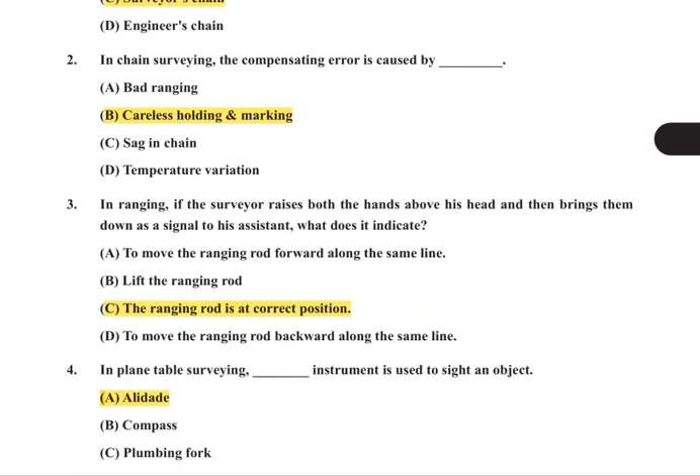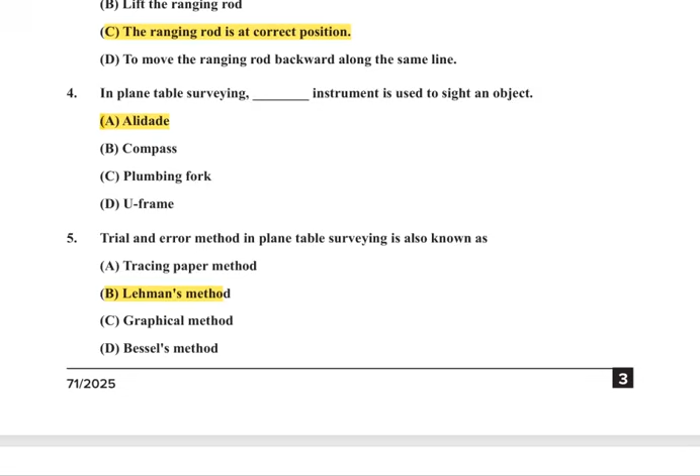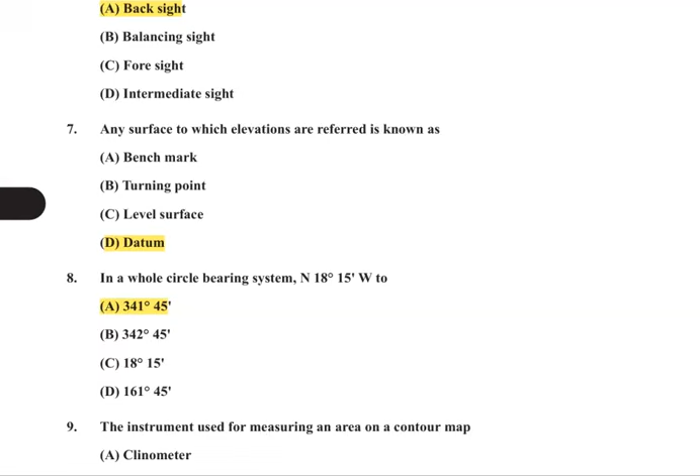4, in a plane table surveying, dash instrument is used to sight an object. Alidade A ആണ്. 5, trial and error method in plane table surveying is also known as B, Lehman's method. 6, in leveling, plus sight is also known as A, back sight. 7, any surface to which elevations are referred is known as D, datum. 8, in a whole circle bearing system, N 18 degree 15 west to A ആണ് 341 degree 45 minutes. 9, the instrument used for measuring an area on a contour map is C, planimeter.

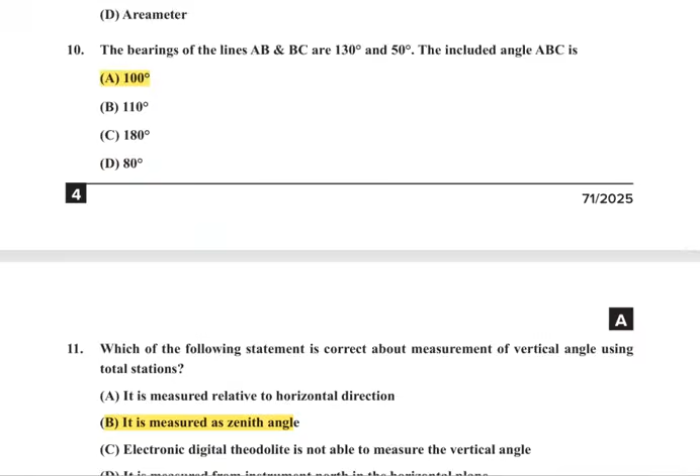10, the bearings of the lines AB and BC are 130 degree and 50 degree. The included angle ABC is A, 100 degree. 11, which of the following statement is correct about measurement of vertical angle using total stations? B, it is measured as zenith angle. 12, theodolite can be used for - ഇവിടെ എല്ലാം ഉണ്ട്, all of the above, D. 13, the least count of a theodolite is A, 20 second.

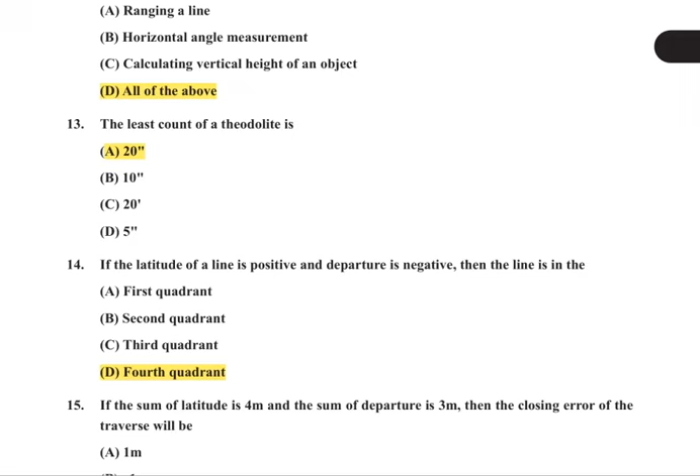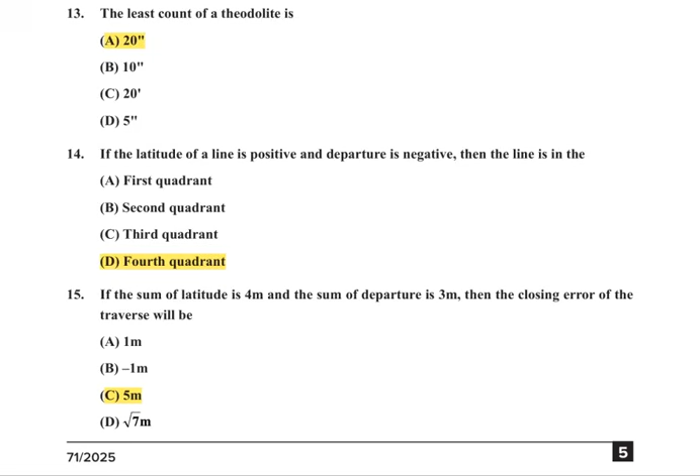14, if the latitude of a line is positive and departure is negative, then the line is in the 4th quadrant, D ആണ്. 15, if the sum of latitude is 4 meter and the sum of departure is 3 meter, then the closing error of the traverse will be C, 5 meter.

16, the length of a long chord of a circular curve of radius R, deflection angle delta degree is given by D, 2R sin delta by 2. 17, a simple circular curve of radius 300 meter is to be set out on field. Calculate the value of verse sine for the curve if the deflection angle delta equals 120 degree. C, 150 meter. 18, which of the following is an example of vertical curve? C, summit curve.

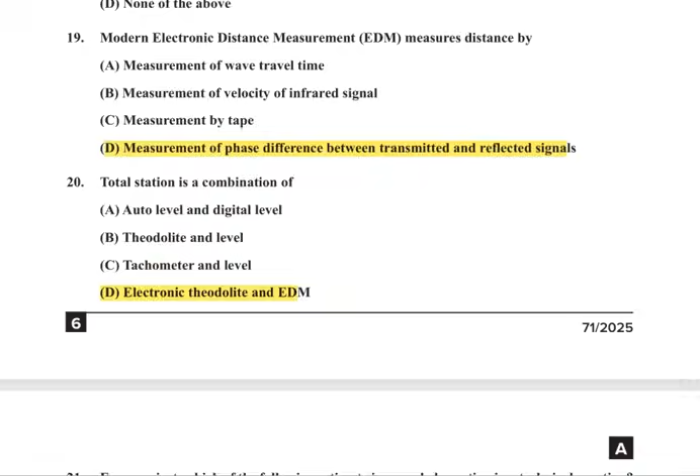19, modern electronic distance measurement measures distance by the measurement of phase difference between transmitted and reflected signals. 20, total station is a combination of the electronic theodolite and EDM. 21, for a project, which of the following estimate is accorded sanction in a technical sanction?

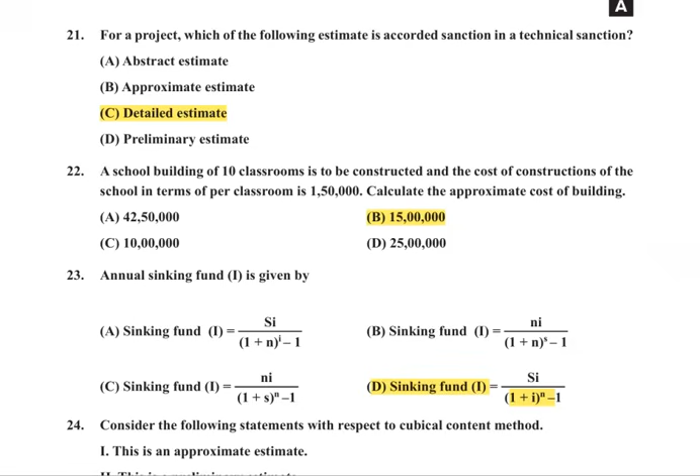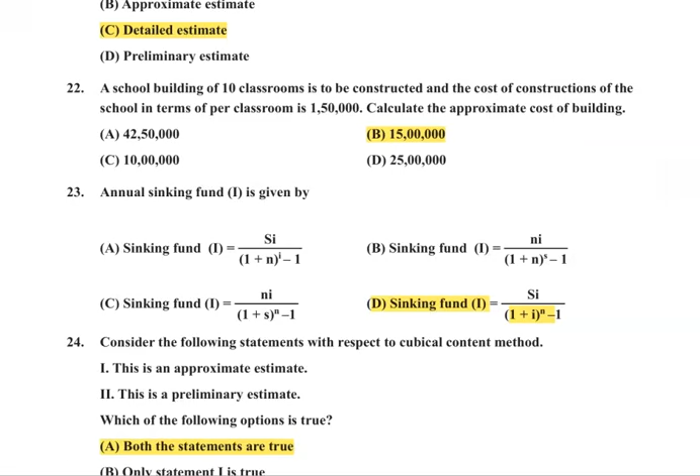C, detailed estimate. 22, problem ആണ്, calculate the approximate cost of building ആണ് 15 lakh. B ആണ് ഉത്തരം. 23, annual sinking fund is given by D. Sinking fund I equals SI by (1 plus I) raised to n, minus 1.

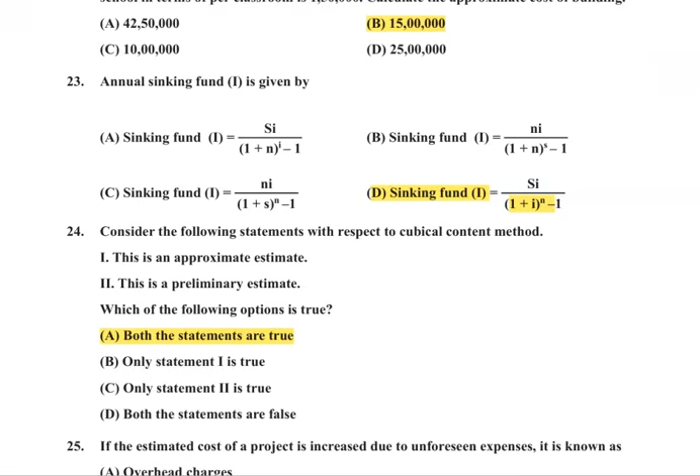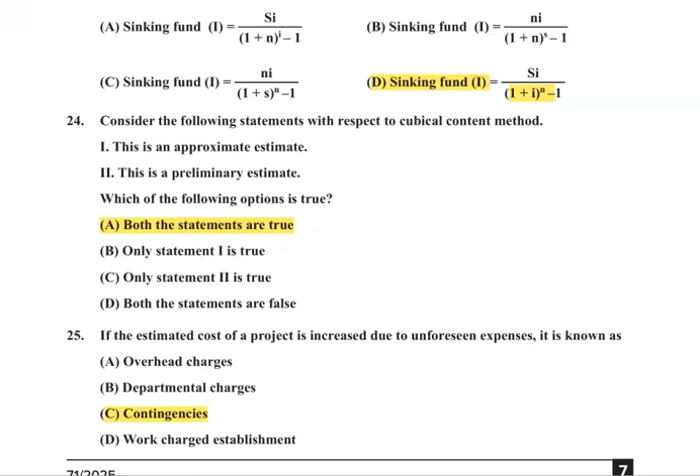24, consider the following statements with respect to cubical content method. രണ്ട് സ്റ്റേറ്റ്മെൻറ്റ് തന്നതിൽ ട്രൂ ആണ്, both of the statements are true, A ആണ്. 25, if the estimated cost of a project is increased due to unforeseen expenses, it is known as C, contingencies. 26, which of the following estimate is done to account the cost required to keep the built structure in safe and working condition? D, repair and maintenance estimate.

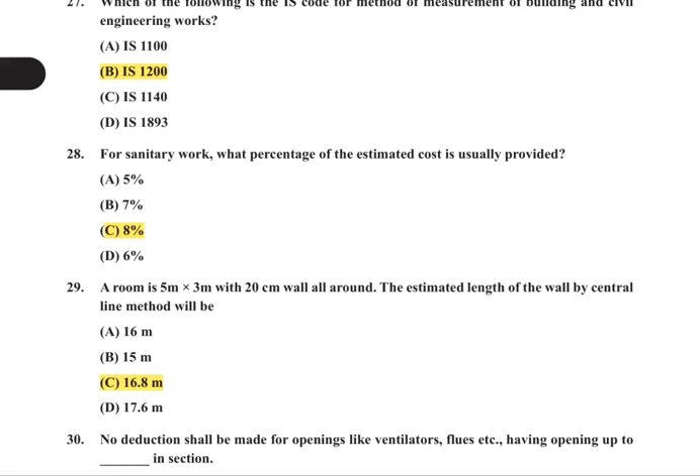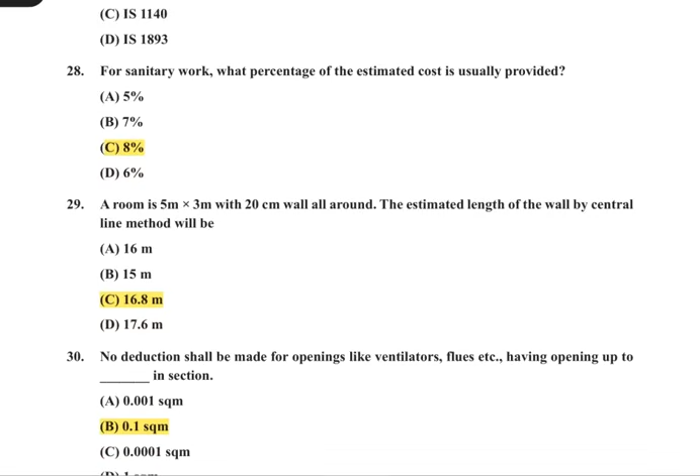27, which of the following is the IS code for method of measurement of building and civil engineering works? B ആണ്, IS 1200. 28, for sanitary work, what percentage of the estimated cost is usually provided? C, 8%. 29, a room is 5 meter into 3 meter with 20 centimeter wall all round. The estimated length of the wall by central line method will be C, 16.8 meter. 30, no deduction shall be made for openings like ventilators, flues, etc., having opening up to 0.1 square meter in section.

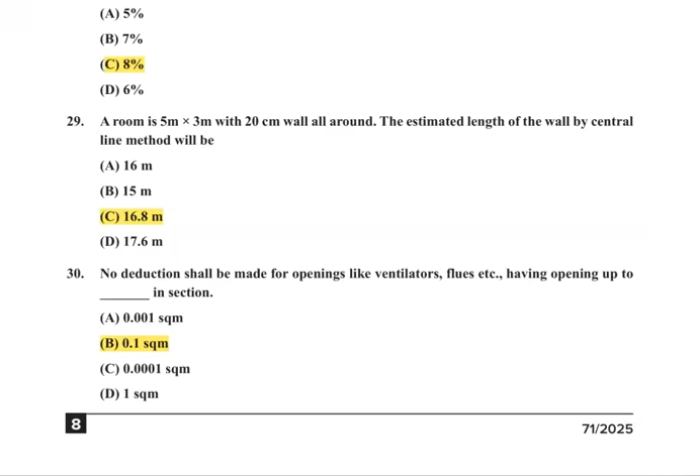31, a good building stone should not absorb 5% of water by weight when kept immersed in water for 24 hours. 32, dimensions of a modular brick as per Indian standards is 19 into 9 into 9 centimeter, A ആണ്.

33. Fine aggregate are those aggregates which pass through 4.75 mm IS sieve. 34. For testing workability of concrete, which test among the following is used? D, all of the above.

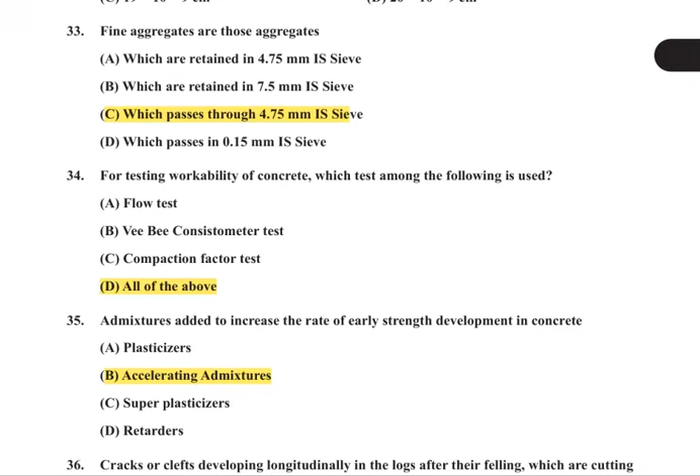35. Admixtures added to increase the rate of early strength development in concrete: B, accelerating admixtures. 36. Cracks or clefts developing longitudinally in the logs after their felling, which cut across the annual rings of the log.

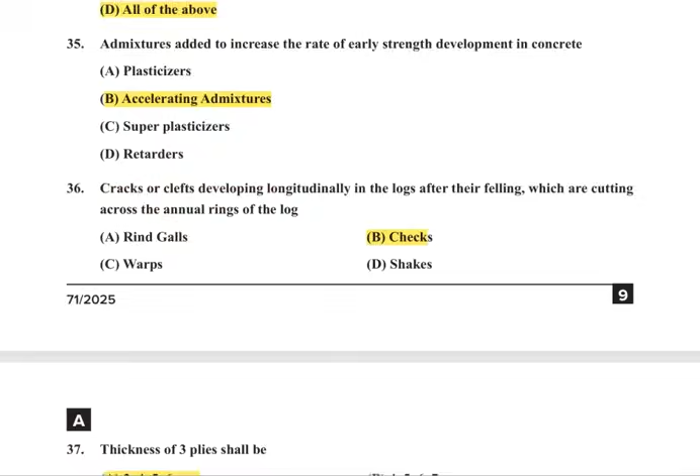Answer: B, checks. 37. Thickness of 3 plies shall be A, 3, 4, 5, 6 mm.

38. Apparatus used for testing soundness of cement: B, Le Chatelier apparatus.

39. Blast furnace is used for the manufacture of A, pig iron.

Chalcocite is an ore of C, copper.

41. Load bearing partition wall is called to be B, internal wall.

42. Incline or splayed surface on the abutment which is prepared to receive the arch, and from which the arch springs, is called skew back.

43. Triangular upper part of the wall formed at the end of a pitched roof is known as a gable.

44. Vertical member which is placed at the ends of the flights to connect the ends of strings and handrail: C, newel post.

47. The minimum stripping time of soffit formwork to beams be 7 days.

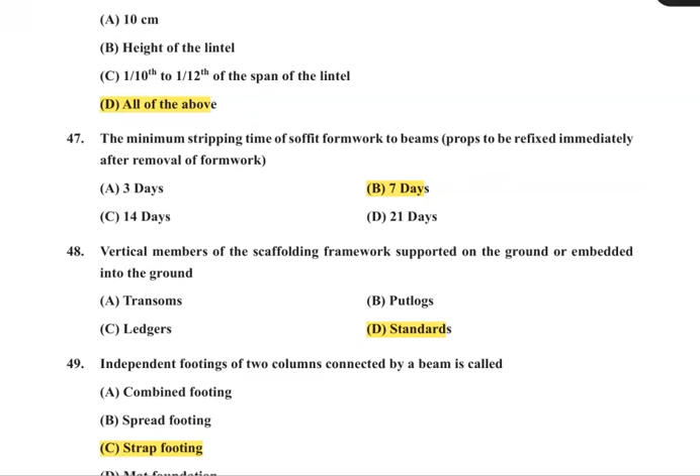48. Vertical members of the scaffolding framework supported on the ground or embedded into the ground: D, standards. 49. Independent footings of 2 columns connected by a beam is called C, strap footing.

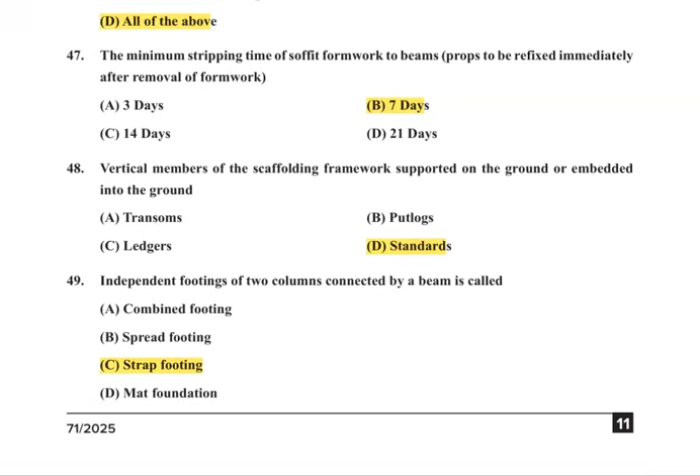50. Process of filling up hollow spaces in the solid background before applying the main body of plaster: A, dubbing coat.

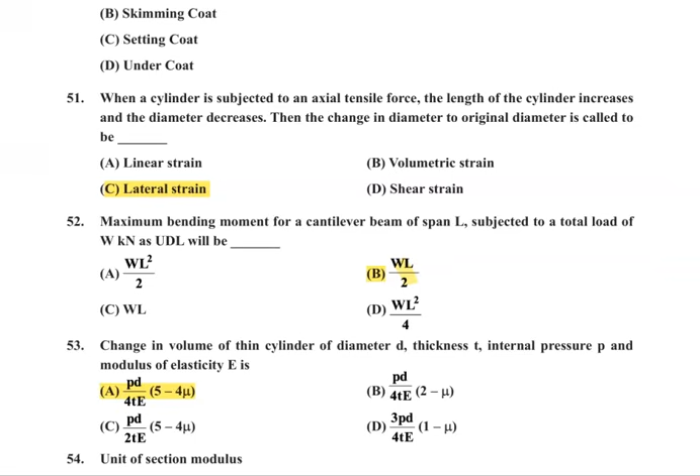52. Maximum bending moment of a cantilever beam of span L subjected to a total load of W kilonewton as UDL will be B, WL by 2.

53. Change in volume of a thin cylinder of diameter D, thickness T, internal pressure P and modulus of elasticity E is PD by 4TE into (5 minus 4 mu).

54. Unit of section modulus: C, meter cube.

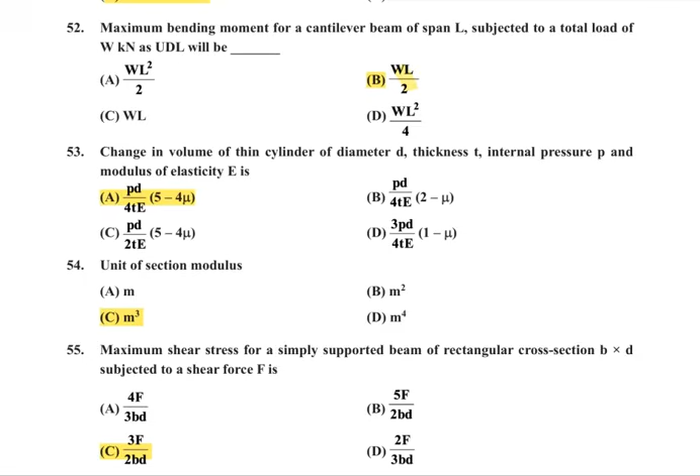55. Maximum shear stress for a simply supported beam of rectangular cross section B into D subjected to a shear force F is C, 3F by 2BD.

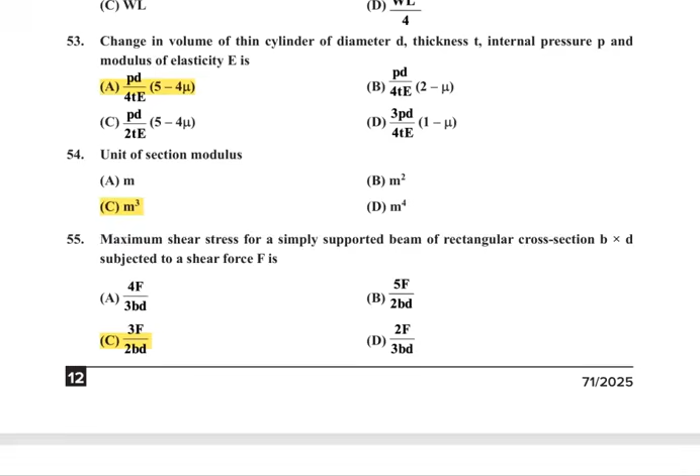56. Polar section modulus of a circular section with D as diameter: B, pi D cube by 16.

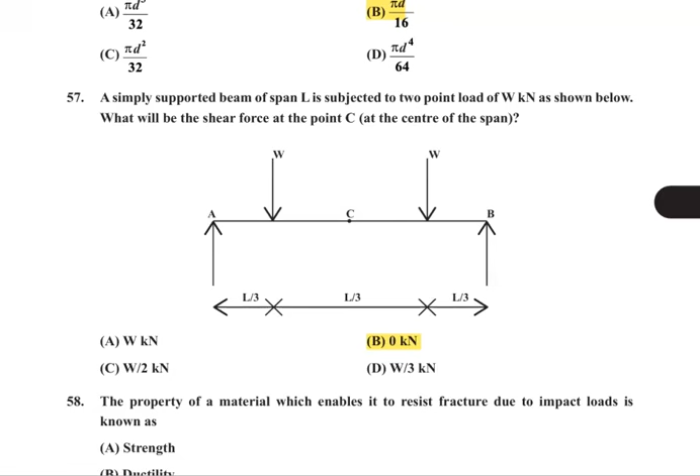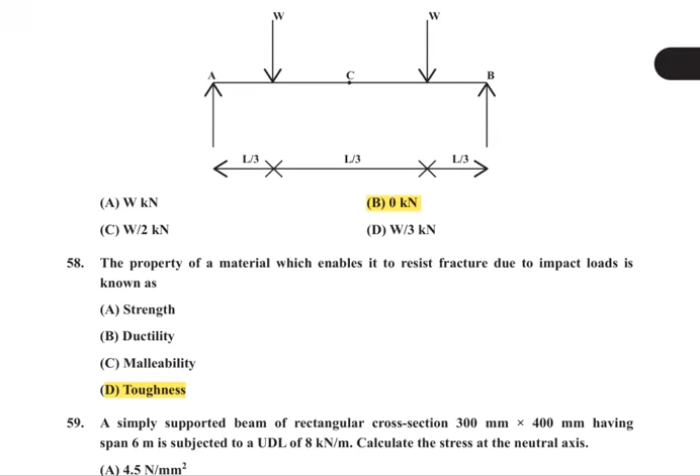58. The property of a material which enables it to resist fracture due to impact load is known as D, toughness. 59. A simply supported beam of rectangular cross section 300 mm into 400 mm having span 6 meter is subjected to a UDL of 8 kilonewton per meter.

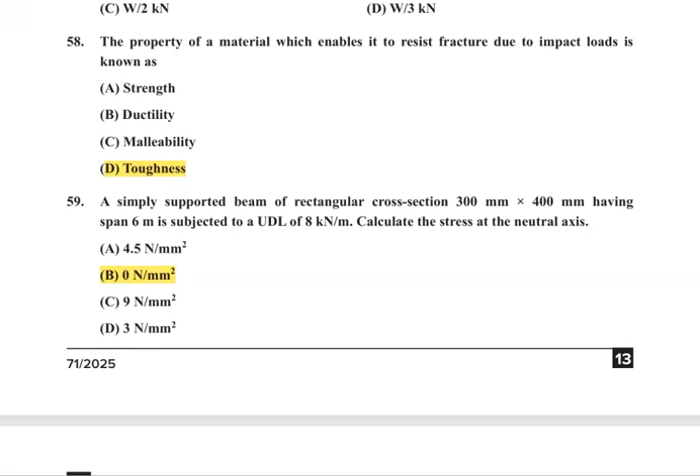Calculate the stress at the neutral axis: B, 0 Newton per millimeter square.

60. Line of action of forces pass through a single point. Such forces are called concurrent forces.

Answer B. 61. Which of the following is not an index property of soil?

D, permeability. 62. What is the lowest water content at which the soil is fully saturated? D, shrinkage limit. 63. The maximum size of clay particle is 0.002 mm.

Answer C. 64. When the hydraulic gradient value is 1, what is the velocity of flow of water through the soil? A, coefficient of permeability.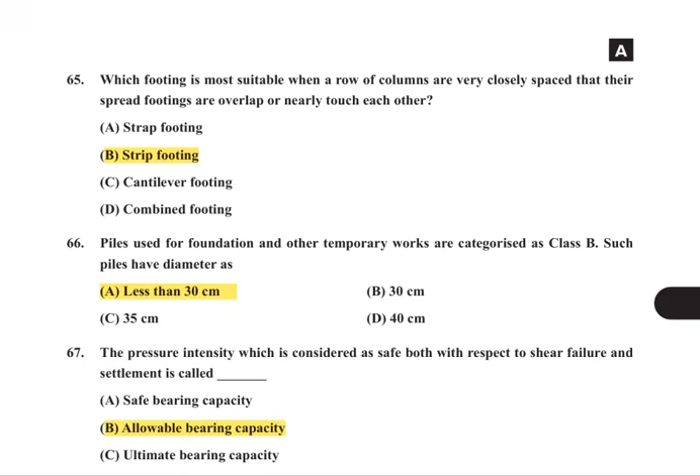65. Which footing is the most suitable when a row of columns are so closely spaced that their spread footings overlap or nearly touch each other? B, strip footing. 66. Piles used for foundation and other temporary works are categorized as class B. Such piles have diameter less than 30 cm.

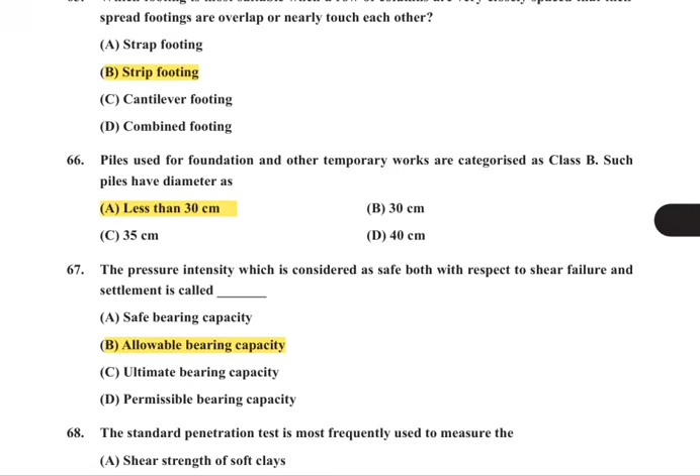Answer A. 67. The pressure intensity which is considered safe both with respect to shear failure and settlement is called B, allowable bearing capacity.

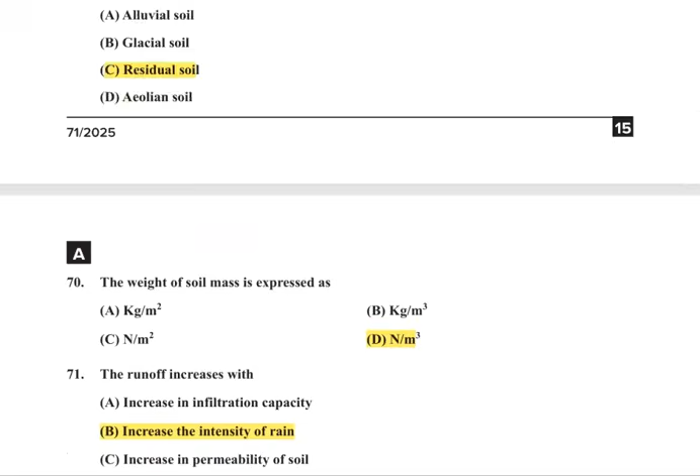68. The standard penetration test is most frequently used to measure the relative density of granular soils. 69. When the products of rock weathering are not transported as sediments but remain in place, the soil is known as residual soil. 70. The weight of soil mass is expressed as D, Newton per meter cube. 71. The runoff increases with B, increase in intensity of rain. 72. The major resisting force in a gravity dam is C, self weight of dam.

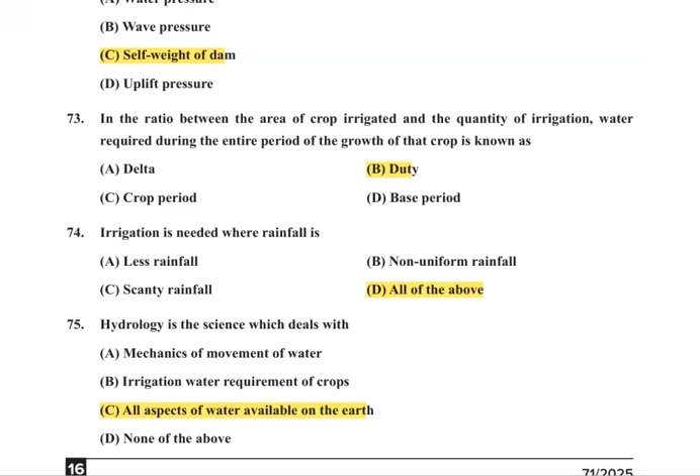73. The ratio between the area of crop irrigated and the quantity of irrigation water required during the entire period of growth of that crop is known as B, duty. 74. Irrigation is needed where rainfall is D, all of the above. 75. Hydrology is the science which deals with C, all aspects of water available on earth. 76. Dickens' formula for high flood discharge is useful for catchments in northern India, B.

77. The gap or margin between full supply level and top of the bank is called freeboard. 78. Earth dam could be constructed with only D, clay. 79. In a super passage, the full supply level of the canal is lower than the underside of the trough carrying drainage water. 80. Soil erosion is caused by drag action of wind, abundant rainfall, unprotected soil surface - all of the above, D.

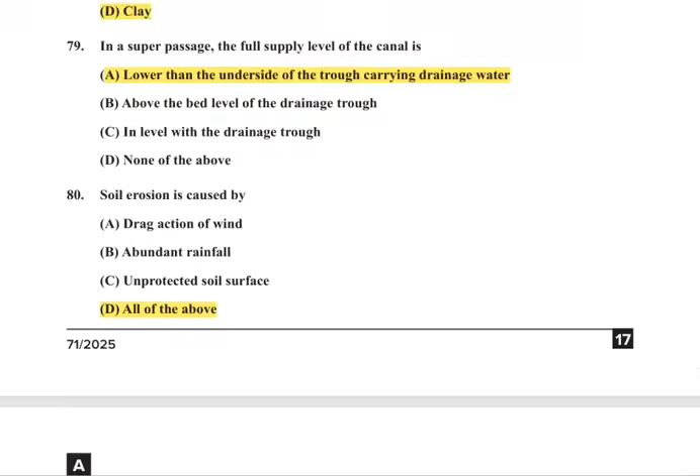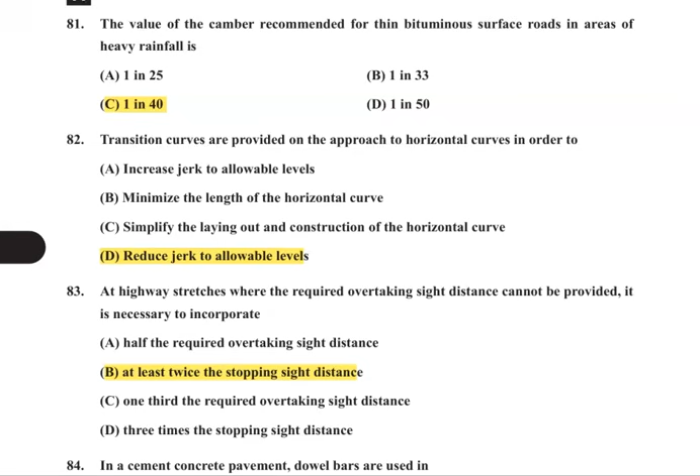81. The value of the camber recommended for thin bituminous surface roads in areas of heavy rainfall is C, 1 in 40. 82. The transition curves are provided on the approach to horizontal curves in order to reduce jerk to allowable levels.

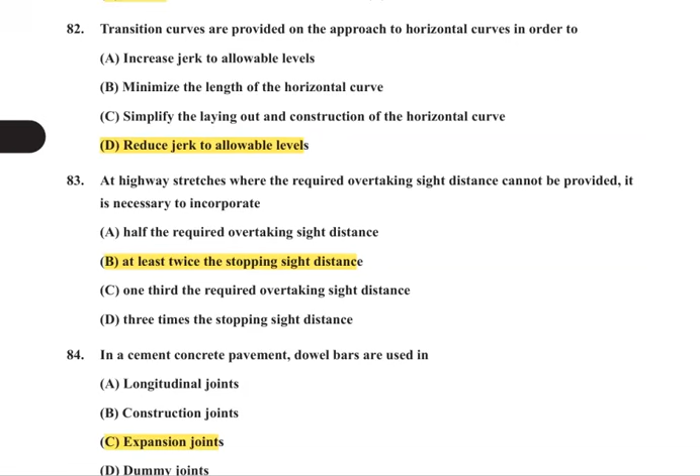83. At highway stretches where the required overtaking sight distance cannot be provided, it is necessary to incorporate B, at least twice the stopping sight distance. 84. In a cement concrete pavement, dowel bars are used in C, expansion joints. 85. Mud pumping is commonly associated with D, cement concrete pavement on clay subgrade.

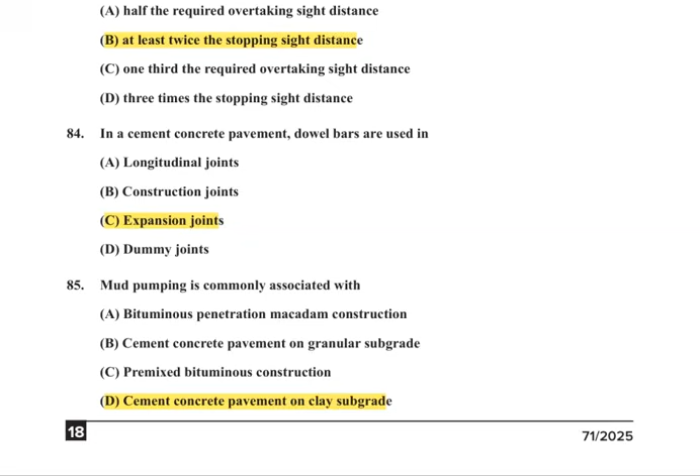86. Desire lines are drawn based on D, origin and destination studies. 87. On Indian Railways, the standard length of rails for broad gauge track is 12.8 meters, C. 88. The longitudinal movement of rails in a track is known as C, creep. 89. As far as possible, the alignment of bridge should be B, square alignment.

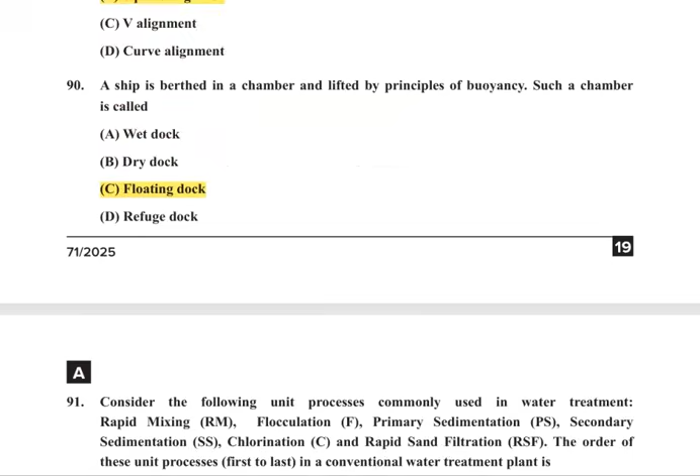90. A ship is berthed in a chamber and lifted by principles of buoyancy. Such a chamber is called C, floating dock. 91. The order of this unit process in a conventional water treatment plant is B: PS, RM, F, SS, RSF, C.

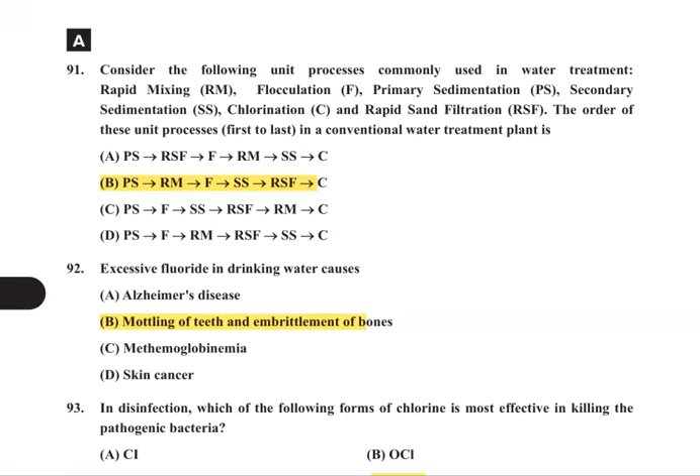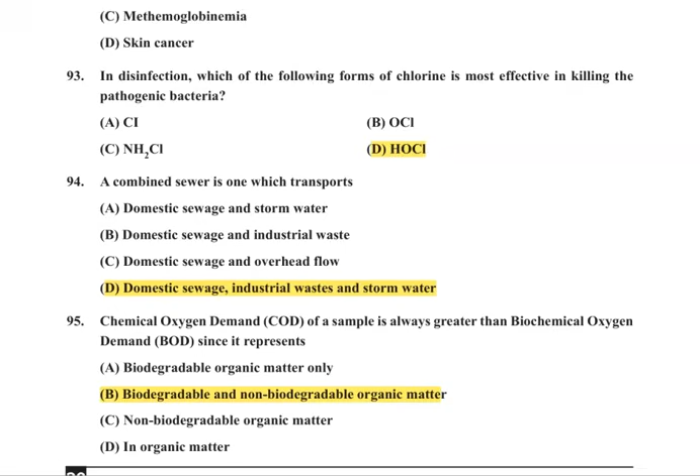92. Excessive fluoride in drinking water causes B, mottling of teeth and embrittlement of bones. 93. In disinfection, which of the following forms of chlorine is most effective in killing pathogenic bacteria? D, HOCl. 94. A combined sewer is one which transports D, domestic sewage, industrial waste and storm water.

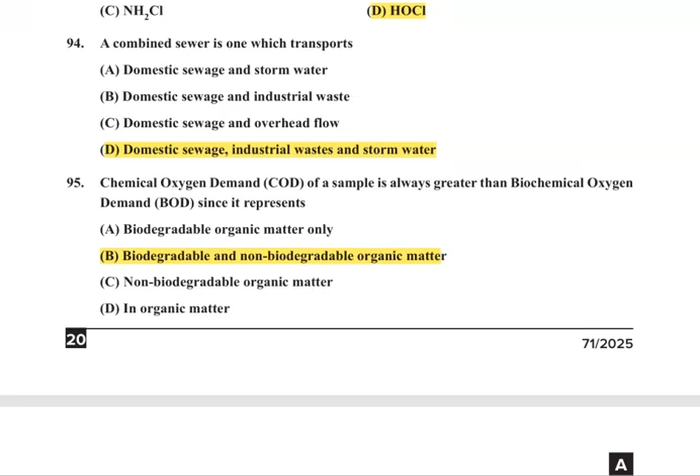95. Chemical oxygen demand of a sample is always greater than biochemical oxygen demand since it represents B, biodegradable and non-biodegradable organic matter. 96. High COD to BOD ratio of an organic pollutant represents a low biodegradability of the pollutant.

97. Which one of the following is a measure of light transmitting properties of wastewater? C, turbidity. 98. The theoretical time taken by a particle of water to pass between entry and exit of a settling tank is known as B, detention period. 99. Zero hardness of water is achieved by C, ion exchange treatment.

100. Which of the following methods is used to forecast the population of a young and rapidly increasing city? B, geometrical increase method. So this is the provisional answer key given by PSC for this examination.